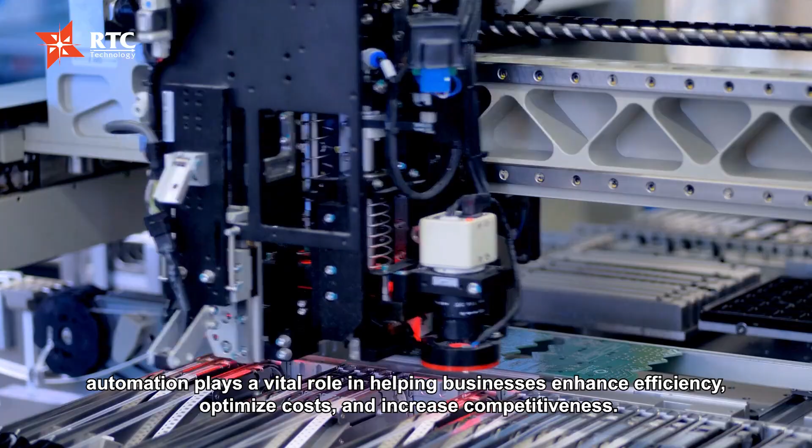In the industrial era, automation plays a vital role in helping businesses enhance efficiency, optimize costs, and increase competitiveness. Founded in 2012 in Vietnam, RTC Technology is a leading science and technology enterprise specialized in providing automation solutions for the industrial sector, especially in the electrical, electronics, semiconductor, automotive, and logistics industry.

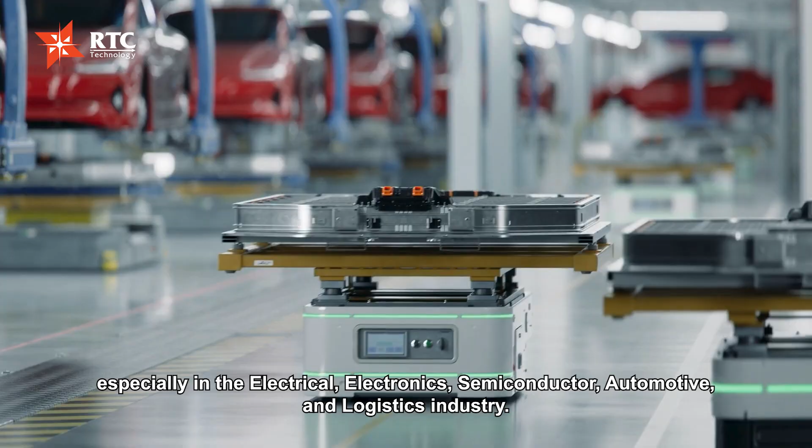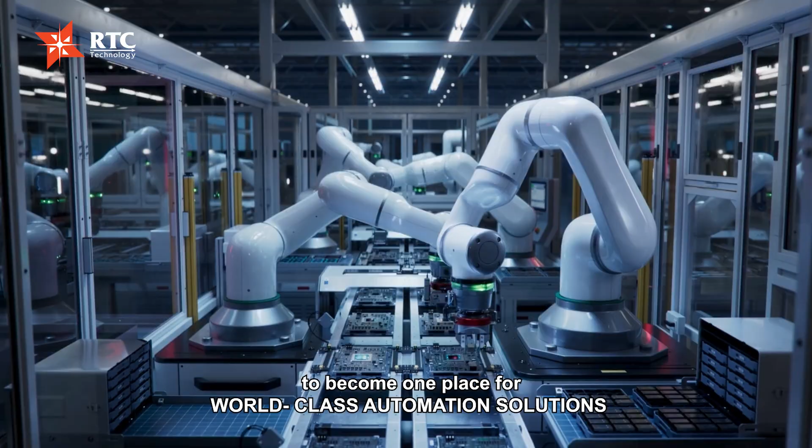Our vision is to be Vietnam's leading pioneer in delivering comprehensive automation solutions and equipment, becoming one place for world-class automation solutions. One-stop automation solution.

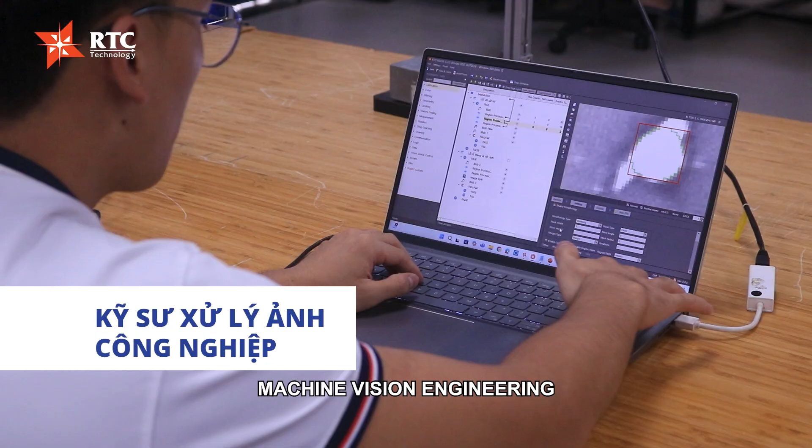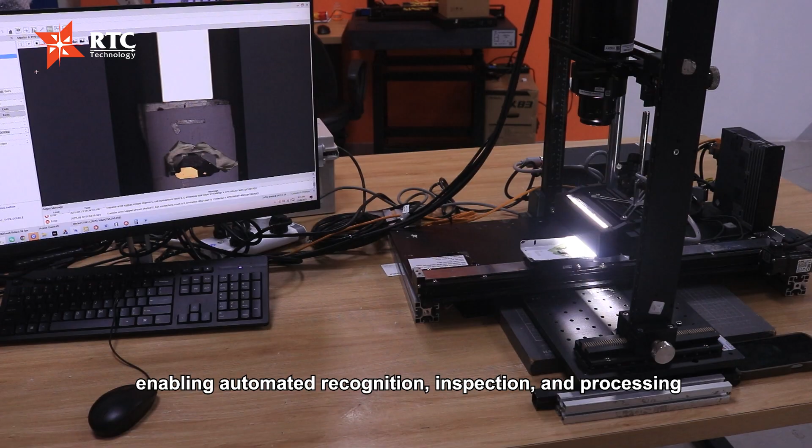Our team comprises machine vision engineering. This team is in charge of designing and integrating machine vision systems, enabling automated recognition, inspection, and processing. They ensure high accuracy, minimize errors, and optimize production workflows.

Mechanical engineering design. Mechanical engineers design and simulate machine structures and components, ensuring stable and durable operation. They transform automation solutions into reliable systems.

Software programming technology. This team develops control software, from PLCs to SCADA, e-factory, e-logistics, smart warehouse, enabling intelligent and flexible machine operation.

Project management. Our project management team is responsible for coordinating resources, tracking progress and budget, and guaranteeing the solution is delivered on time and exceeds client expectations.

Automation is the key to efficiency. RTC Technology offers holistic solutions. Machine vision: comprehensive industrial image processing for high-precision defect detection.

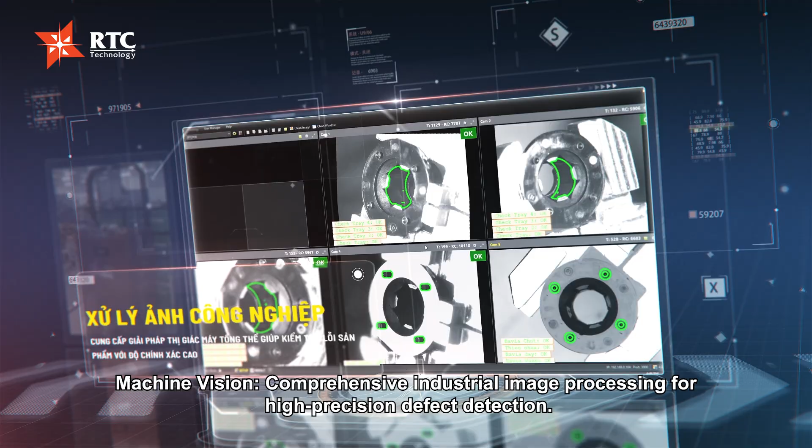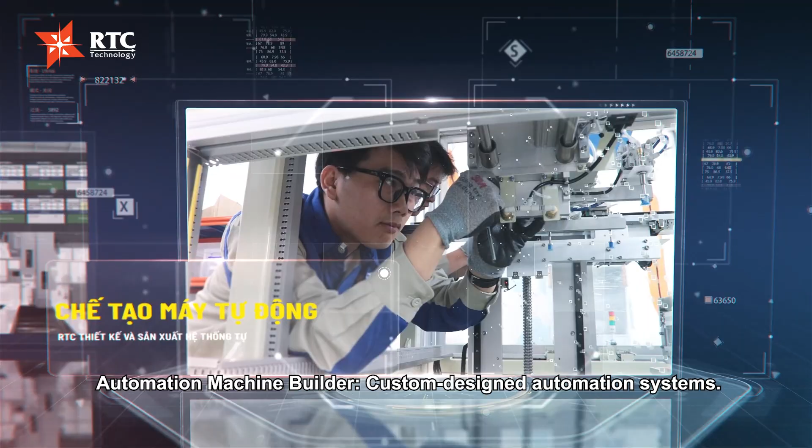AGV-AMR: autonomous vehicles for seamless material transport, optimizing logistics. Automation machine builder: custom-designed automation systems. IoT, OEE, SCADA, e-factory, e-logistics, smart warehouse: digital solutions for real-time monitoring and optimization. Automation equipment: robots, sensors, and controllers from top global brands.

Also, industrial image processing solution for highly accurate error detection. One, inspection. Machine vision systems can automate complex or regular visual inspection tasks and precisely guide handling equipment during the process.

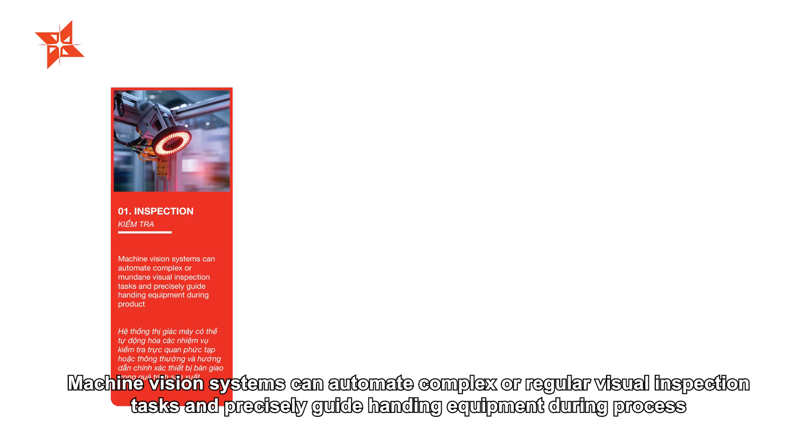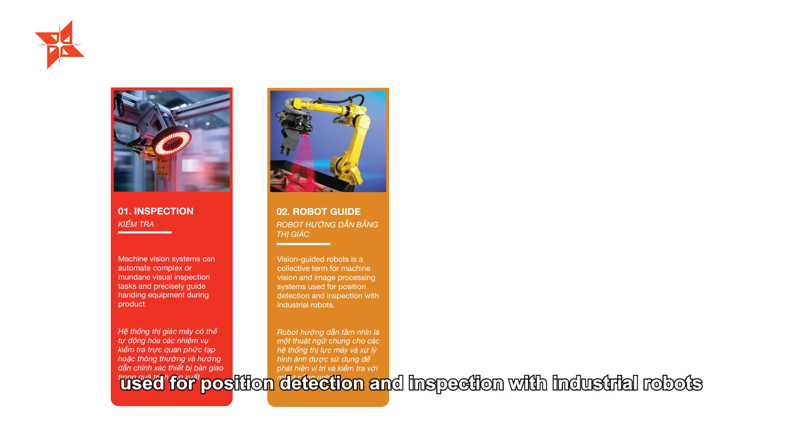Two, robot guide. Vision-guided robot is a general term for machine vision and image processing systems used for position detection and inspection with industrial robots.

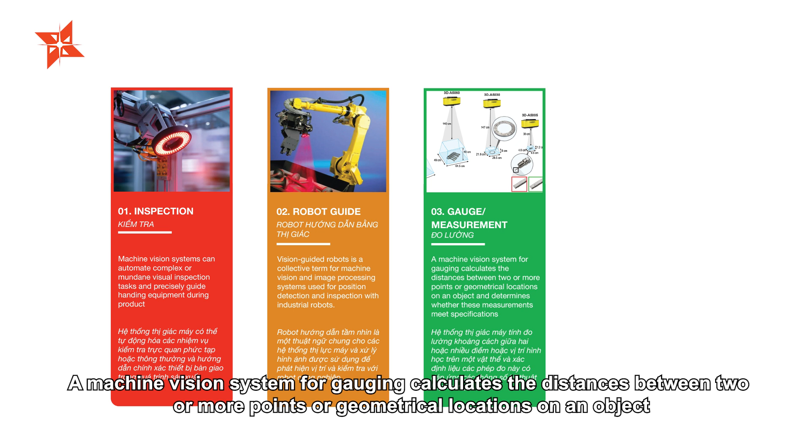Three, gauge measurement. A machine vision system for gauging calculates the distances between two or more points or geometrical locations on an object and determines whether these measurements meet specifications.

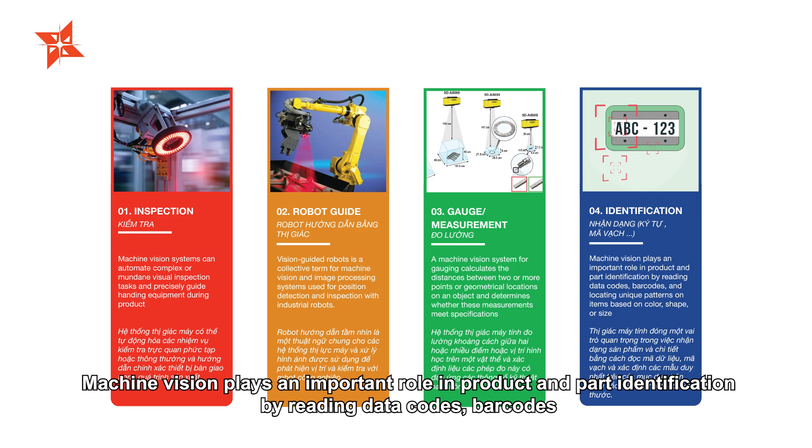Four, identification. Machine vision plays an important role in product and part identification by reading data codes, barcodes, and locating unique patterns on items based on color, shape, or size.

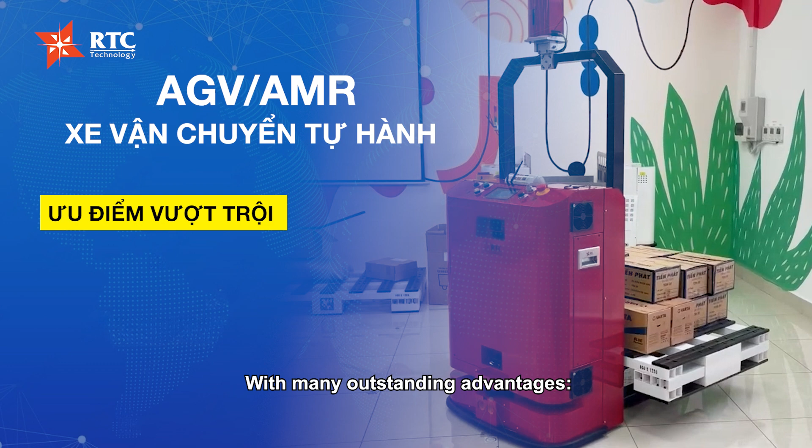AGV-AMR: automated guided vehicles, autonomous mobile robots for autonomous material transport, optimizing logistics, with many outstanding advantages: wide loading range suitable for many types of goods.

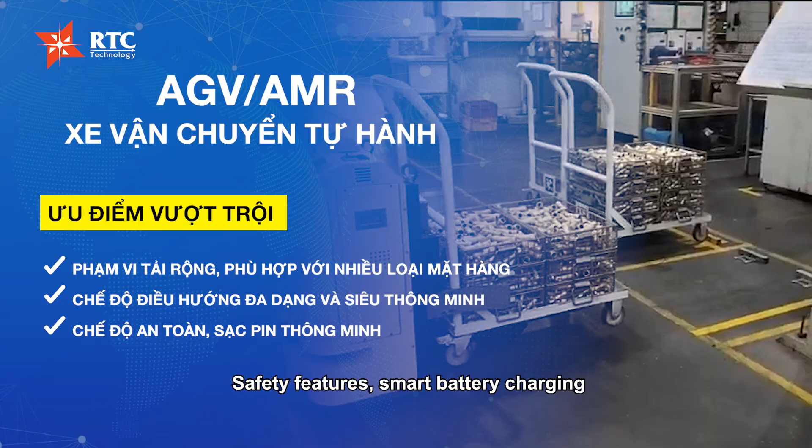Diverse and intelligent navigation modes. Safety features, smart battery charging. Adaptive and flexible manufacturing application for factories.

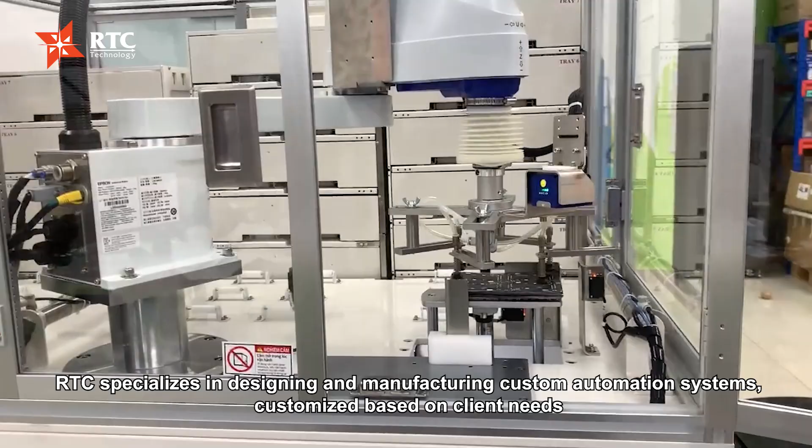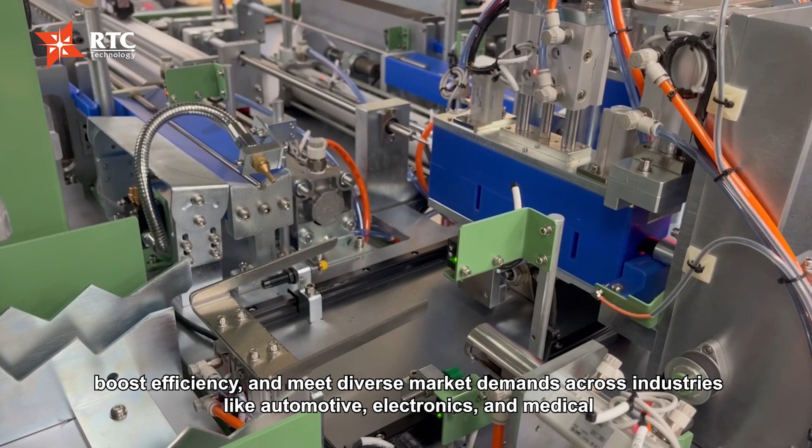Automation machine builder. RTC specializes in designing and manufacturing custom automation systems, customized based on client needs. Our advanced machine building solutions accelerate production, boost efficiency, and meet diverse market demands across industries like automotive, electronics, and medical.

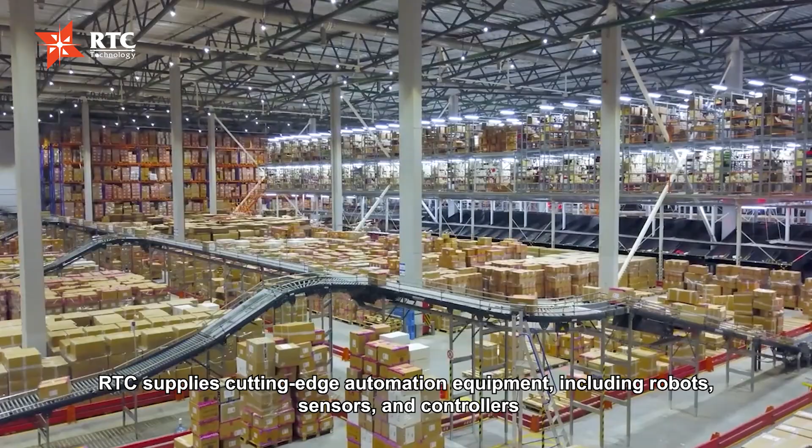Automation equipment. RTC supplies cutting-edge automation equipment, including robots, sensors, and controllers, from leading global brands such as Datalogic, Fujifilm, MVTec, Hikrobot, and LMI.

Service Center: Product Maintenance and Service Center. Our service center is committed to accompanying customers throughout the entire product lifecycle, offering proactive maintenance, fast warranty handling, and comprehensive technical support.

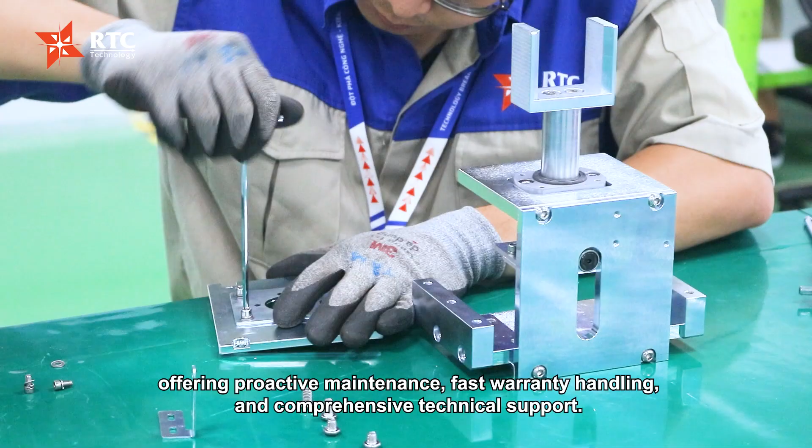At RTC, we don't just build technology, we also build an ideal working environment where every individual is valued and can achieve holistic development.

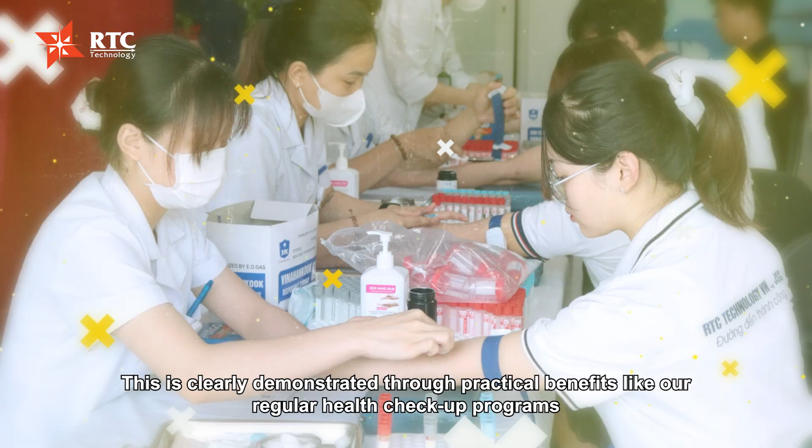This is clearly demonstrated through practical benefits like our regular health checkup programs and vibrant sporting activities such as football and badminton tournaments. We believe that a happy and healthy team is the foundation for continuous innovation and sustainable success.

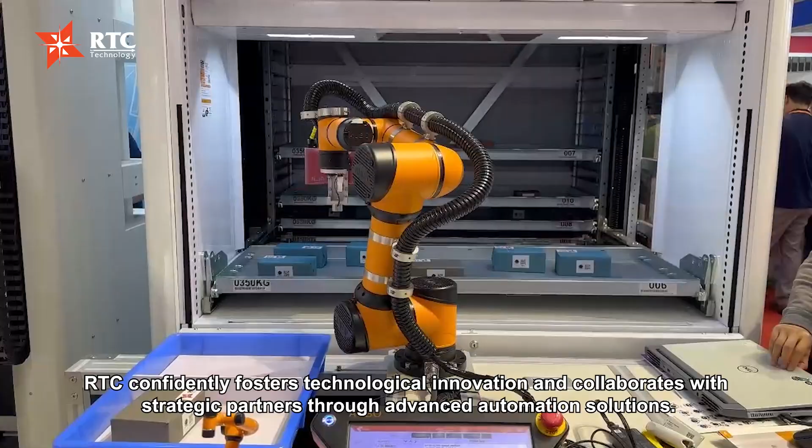From Vietnam, extending our reach across Asia-Pacific, Europe, and America, RTC confidently fosters technological innovation and collaborates with strategic partners through advanced automation solutions. Throughout our journey, RTC proudly stands as a science and technology enterprise, holding ISO certification and copyright registrations.

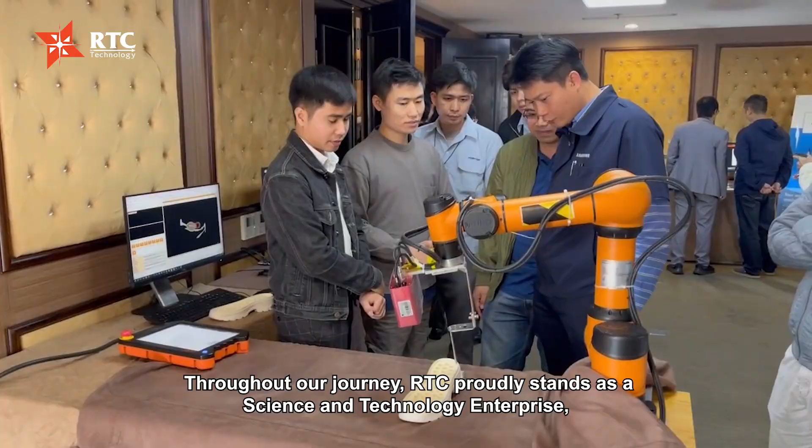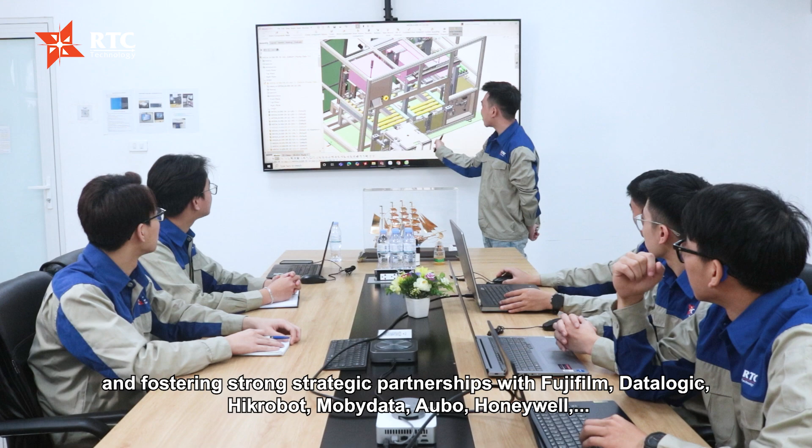We are committed to technological advancement, delivering superior quality products, and fostering strong strategic partnerships with Fujifilm, Datalogic, Hikrobot, Mobydata, Aubo, and Honeywell.

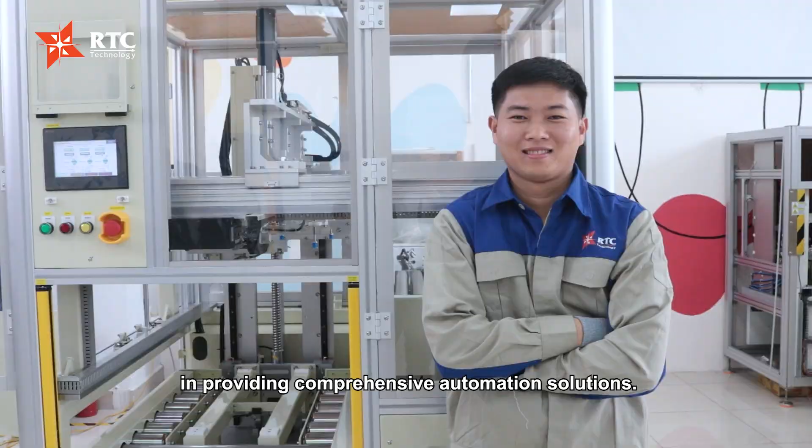RTC Technology. We strive constantly to realize our vision of becoming Vietnam's leading pioneer in providing comprehensive automation solutions. RTC Technology: technological breakthrough, building the future.